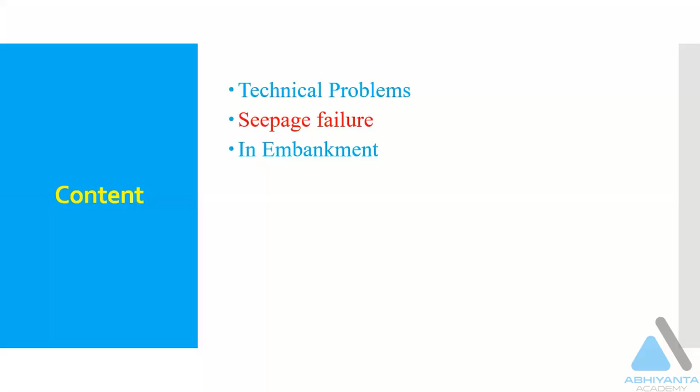First, we are going to discuss the technical problems. Then we are going to discuss the seepage failure, into the embankment as well as into the foundation. Then we are going to discuss water leakage, and then the methods to measure seepage.

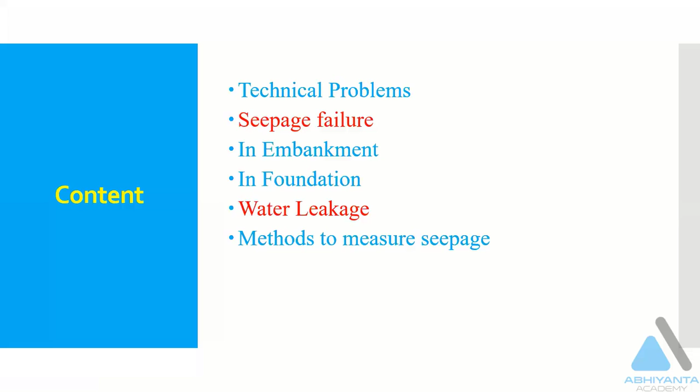Then we are going to discuss slope instability, overtopping and erosion. What you see in red colored font are the types of failure, and the remaining portion in blue are the contents.

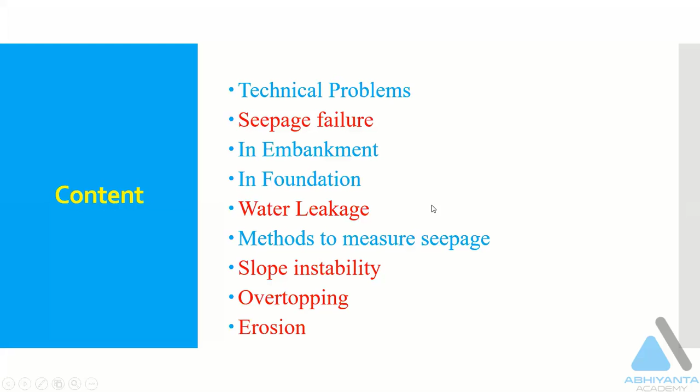So before that, we will discuss the introduction of canal failure. Now just tell me, if you are aware of the word canal failure, what are the causes of canal failure according to you?

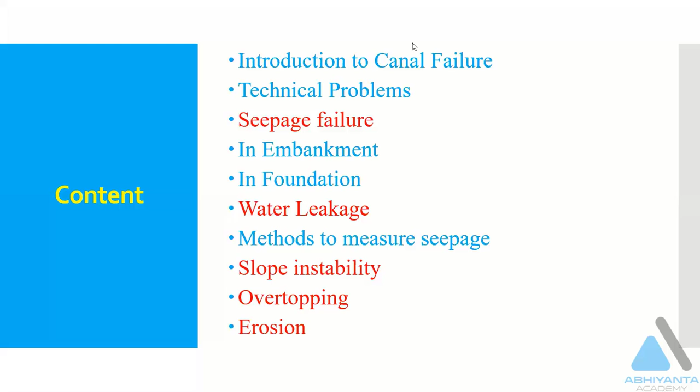Very good, Bhumi. So let's discuss that in detail. Suppose in an interview they ask you such a question, how are you going to react or share your views with the interviewer? So let's understand the introduction part.

The main problems found in an irrigation canal network include limited amount of water available at the water sources. This can lead to canal failure. Now let me show you how it will react or perform as a canal failure.

For example, this is your canal. This is your head regulator - a place from where we will initiate or discharge the water into the canal, from where we will start the canal flow. Now just try to think about it.

This is an unlined canal. If it is an unlined canal, it means we are all aware that this canal is an earthen canal - it's made of soil.

Now if water is flowing through this canal 24/7, it means the soil particles will remain saturated, or covered with full moisture. It will be saturated. But just try to think about it - the canal remains closed for 1 week in a month.

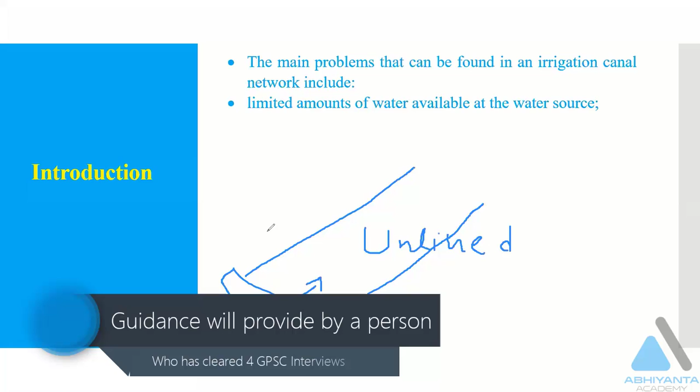Whenever we start the flow of water into the canal, due to its high velocity, there will be causes of erosion. When dry particles suddenly get hit by the water flow, scouring or erosion starts immediately.

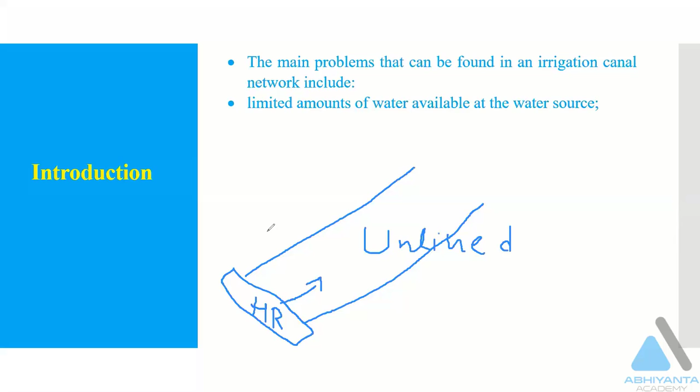What is the meaning of inundation canal? If you're aware of the word inundation, is there any difference between a perennial canal, a permanent canal, and an inundation canal? What's the difference between them?

A canal which doesn't allow flow of water throughout the year diverts flood water in a particular season when much flow is available, but doesn't run throughout the year like a perennial canal. So a canal which runs throughout the year - if I'm talking about the Narmada main canal, you find water in it for 12 months. That is a permanent canal.

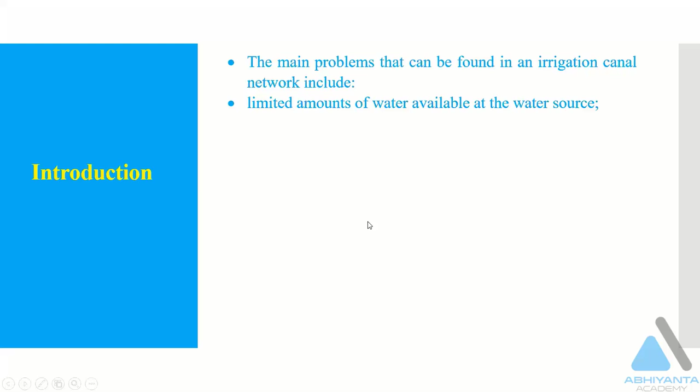That is, limited amount of water available at the water source, or periodic supply of water into the canal, then high water consumption in fields close to the water source resulting in water shortages at the tail end of the scheme. Canal failure doesn't just mean the canal bank breaks - if I'm not properly able to supply water, that is also failure of the canal network.

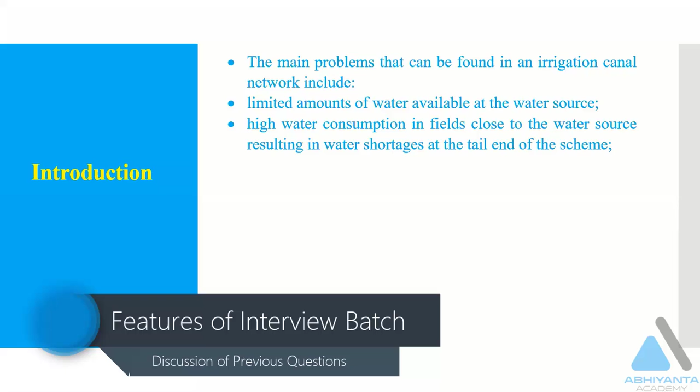If we have ample quantum of water but are not able to supply the water because of improper management, this is also considered failure of the canal.

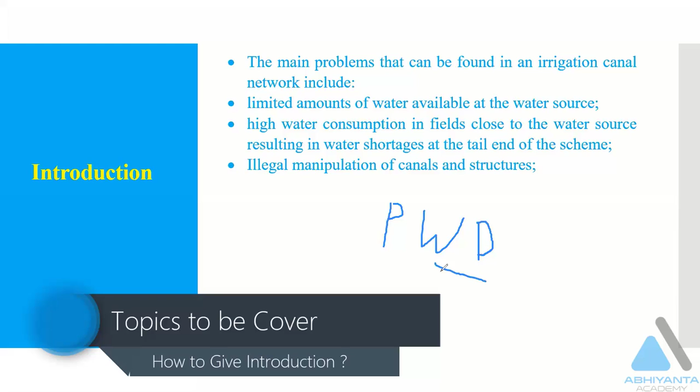When the technical field originated in Gujarat, at that time there was a common department which was the PWD department, Public Works Department - not Public Worst Department, it is Public Works Department. It had two parts: that was the Road and Building Department, and the second one related to irrigation.

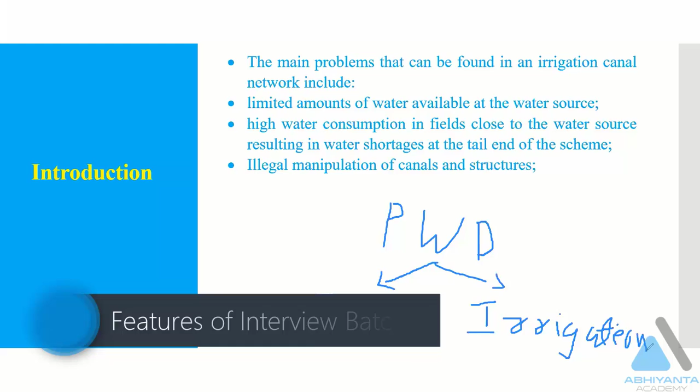During the decade of 1990, these two departments got separated due to the tremendous work pressure. But until the decade of 1990, these two departments were common.

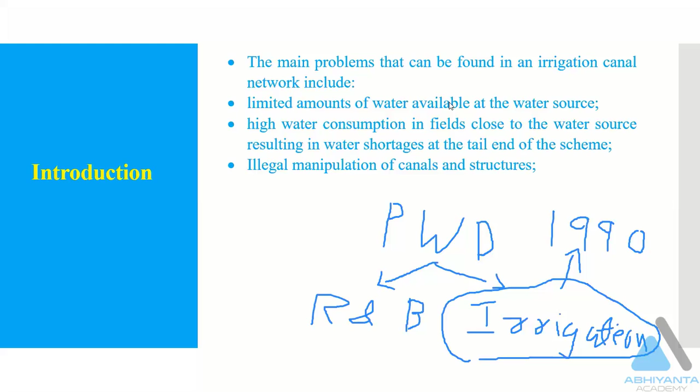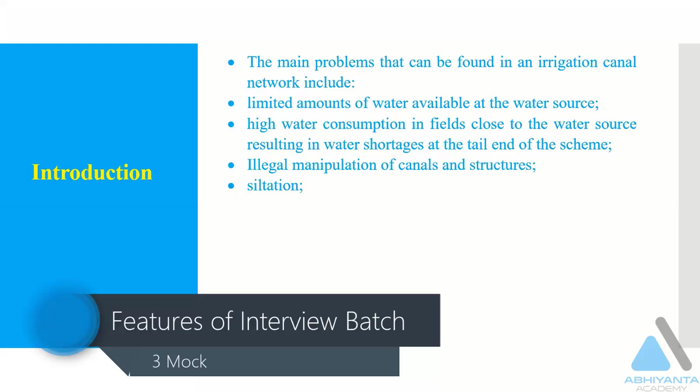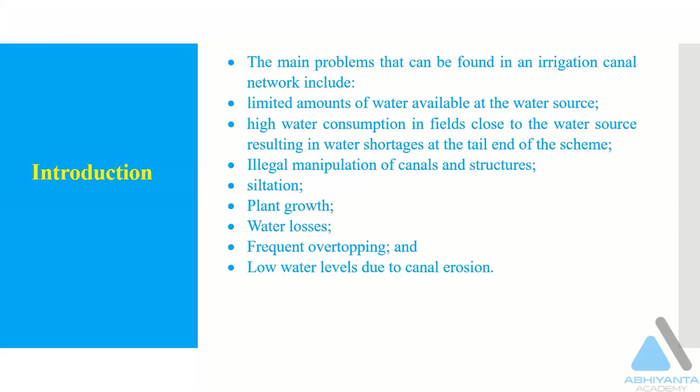Then after siltation, that is also a kind of major failure. Then there's plant growth, water losses, frequent overtopping, low water levels due to canal erosion, bad design, or bad construction.

Maybe you read in the newspaper a few days back that India is ranked first as a corrupted country among all countries in Asia. So bad construction can play a vital role into that. Generally, the majority's mindset is that once we become a government officer, we just have to do corruption. But if you are having the same mentality, please do not attend this session.

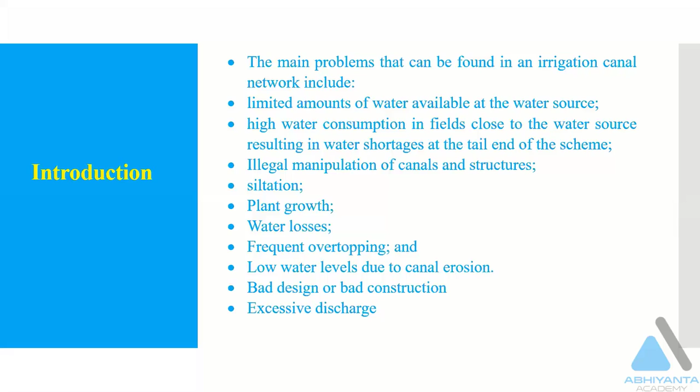Then there's excessive discharge - it means if we are supplying water into the canal beyond its capacity, more than its capacity, that can also cause canal failure. So these are all the various kinds of causes of canal failure.

Let's understand the different reasons too. Also, the water level in the canal may have been wrongly determined, and if it is too low, water may not enter the fields by gravity. So keep that thing in mind.

As I said, failure of the structure is not the only thing considered as canal failure. Just the canal structure failing is not the only canal failure. In addition to that, if we have failed to provide the water, we also call that a canal failure. So as being an irrigation engineer, this is also your role - to supply water to the field.

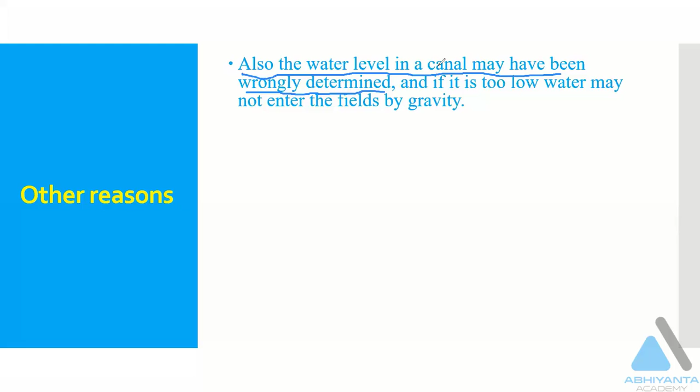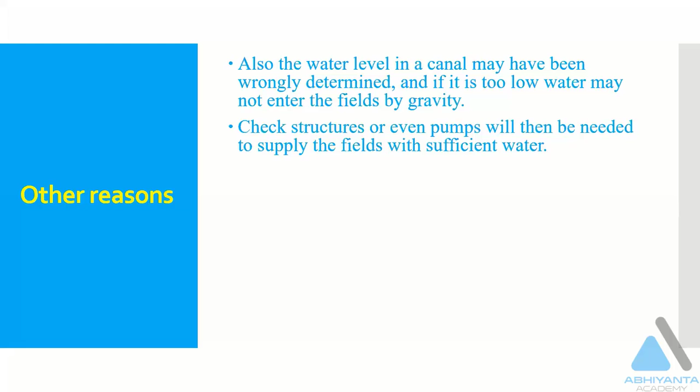Then after, other reasons are there. Check structures or even pumps will be needed to supply the fields with sufficient water. It can also happen due to pumps.

Canal slopes which are too steep may suffer erosion from high flow velocity. As I said earlier, due to high velocity there may be chances of erosion. So generally, where the slope is steeper, more failure happens due to erosion.

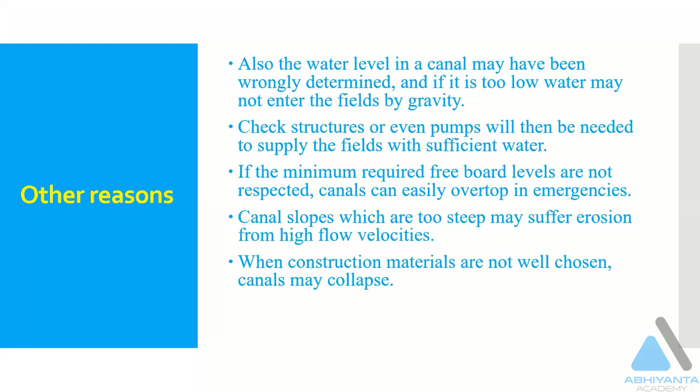When construction materials are not well chosen, the canal may collapse. In one session of ours, I taught you about quality control related to how to identify good material. If it is not following the quality of material, and we have chosen it wrongly, the canal may collapse.

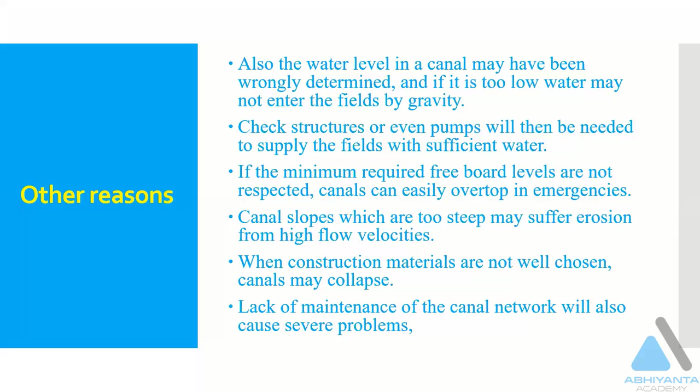Lack of maintenance of the canal network will also cause severe problems. If maintenance is not done properly, that can also cause canal failures. So there are not only limited reasons - there are an unlimited number of reasons behind canal failure. Any other important reasons, we will discuss in detail.

So that is about the technical problems, that is water losses. A well-designed and constructed canal system transports water from the source to the farmer's fields with a minimum amount of water loss.

Now just tell me, which kinds of losses do we normally consider in the canal network, generally?

Seepage, evaporation, very good. Now, which loss will majorly affect - evaporation loss or seepage loss? Which loss affects more, evaporation loss or seepage losses?

Very good, guys. I'm getting a few answers in the chat box. In a lined canal, there is canal evaporation. In an unlined canal, there is seepage. Very good, guys.

So an effective system is one in which the canal system has a minimum amount of losses. That is the effective canal network. But in our nation, approximately 40 to 45% losses are there, and which one is having the highest amount, that we need to understand.

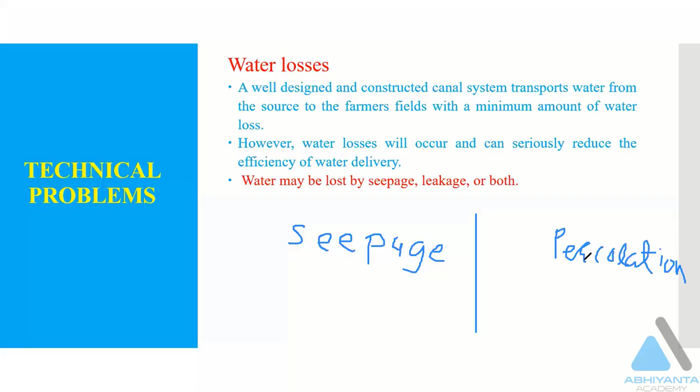Let me show you if you are not aware of that. Seepage is a velocity allowing the flow of water to pass through the soil voids or through the voids. So it is a velocity. Unit is meter per second.

Whereas percolation is the rate of flow. Rate means discharge. So it is measured in meter cube per second. You can see the differences between them.

Seepage and percolation - so seepage is a velocity, whereas leakage is related to the amount of water, the amount which is leaked, the water which is coming out. Seepage may be on the inner side or on the outer side, but leakage happens when it moves out - at that time we consider it as leakage.

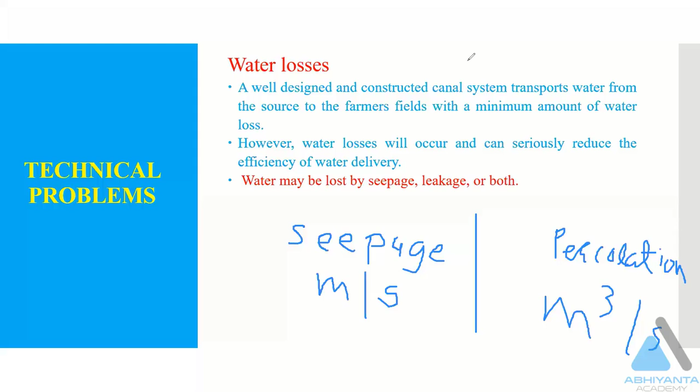So leakage is related to the amount of water, whereas seepage is related to the velocity of water. Leakage is related to the quantity of water, the amount of water.

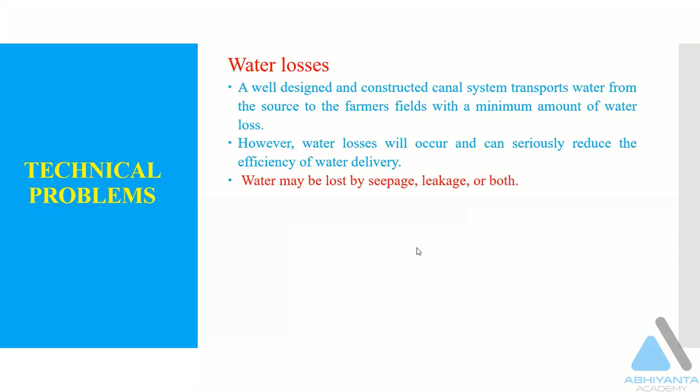Now let's understand what are the seepage losses in detail. Water that seeps through the bed and side of the canal will be lost for irrigation. This so-called seepage loss can be significant where a canal is constructed from material which has high permeability.

Now what do you think - is concrete a 100% impervious material? Is it having permeability too? It means, can I say that concrete is a 100% seepage-proof structure? Can I say that concrete is 100% seepage-proof?

No, I cannot say that. So in a lined canal, the amount of seepage will be lesser, whereas in an unlined canal it will be comparatively higher. Now this will affect more in the unlined canal - majority of this portion affects the unlined canal more.

So the so-called seepage losses can be significant where a canal is constructed from material which has high permeability. Water seeps quickly through sandy soil and slowly through clay soil. This question is also often asked - in which type of material will seepage losses be more, if a canal is constructed over sandy soil or over clayey soil.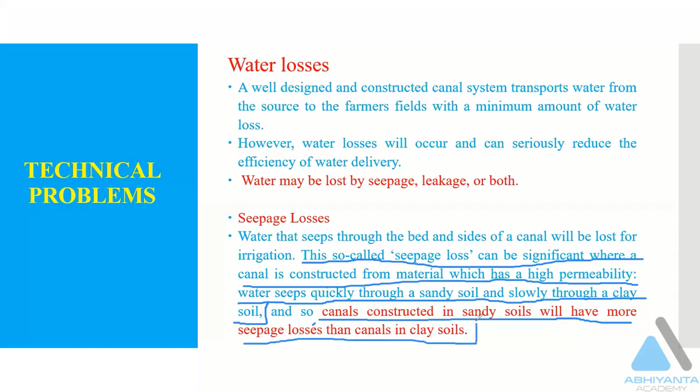So in sandy soil it will always be more, and in clayey soil it will be a little lesser compared to that. So canals constructed in sandy soils will have more seepage losses than canals in clayey soils. I have already concluded the sentence with the red font - it will be more helpful when you read it.

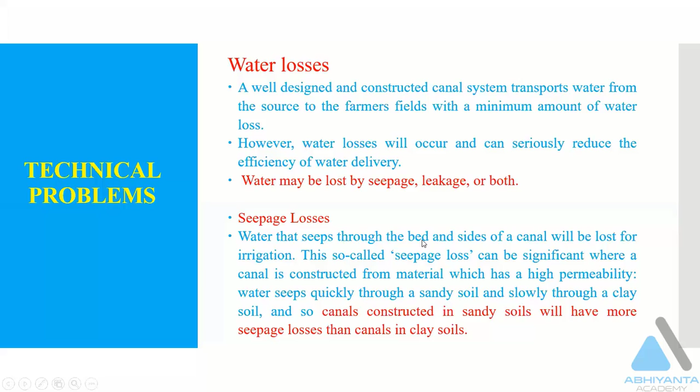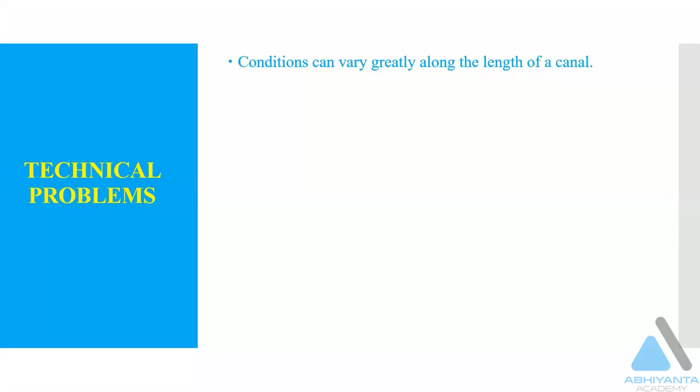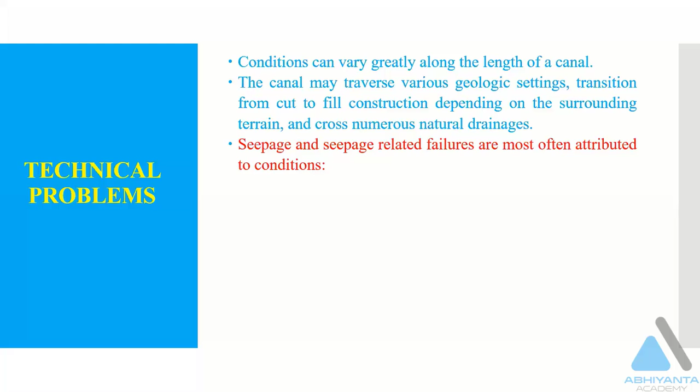This is a very important topic related to seepage losses. Understand this calmly - conditions can vary greatly along the length of canal. Condition need not be common throughout the length. At different locations there may be different values of seepage. The canal may traverse various geologic settings, transition from cutting to filling construction depending on the surrounding terrain, and cross numbers of natural drainages - meaning cross drainage structures like aqueduct, siphon aqueduct and similar. So all these parameters will impact the seepage losses - where the amount will be higher, where it will be lower, all these things will be covered in this particular topic. Seepage and seepage related failures are most often attributed to certain conditions - let's understand carefully which conditions.

Where the canal crosses natural drainages, where coarser alluvial soil might exist - this terminology is important to understand seepage losses. Now what do you mean by the word coarser alluvial soil, or forget about coarser - what do you mean by alluvial soils? Will it allow transport of silt? Will silt transportation happen inside it? Yes.

So if there is allowability of transportation of silt, there are always chances of higher seepage losses. Because with silt transportation, there are higher chances of scouring, higher chances of erosion. And because of that, fine particles wash out. When fine particles wash out, it creates voids. And voids create, it will allow the seepage. So wherever alluvial soil exists, seepage will always be higher compared to non-alluvial soil.

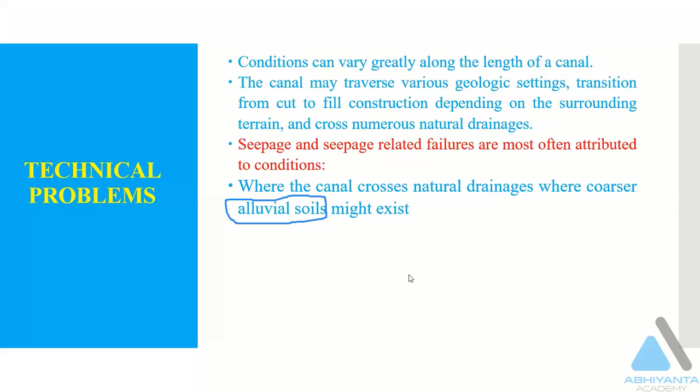Where the canal was constructed through geologic deposits that are more susceptible to erosion, in short granular materials - we construct canal in places where granular materials are more. It means there will be higher voids inside it. So if there are higher numbers of voids, it will allow higher seepage.

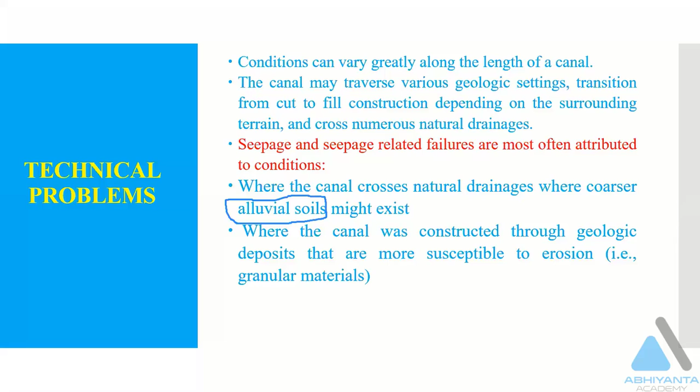Where soluble materials like caliche exist - has anyone seen this? It's known as, pronunciation is caliche. Where soluble materials exist in the foundation. Now just tell me, if I'm talking about salt, is salt soluble into water? Is it soluble into water? I don't know the exact Gujarati name. Yes. If I'm talking about sugar, is it soluble?

Now if I'm talking about stones, will they be soluble into water? No. So when I'm talking about alluvial soils, when I'm talking about silt particles, these are the solubles. As soon as water touches them, they mix into the water. They mix into the water and it is considered a soluble material. So if that exists in the foundation and there's an unlined canal next to it, those particles will keep washing out and there will be chances of higher seepage.

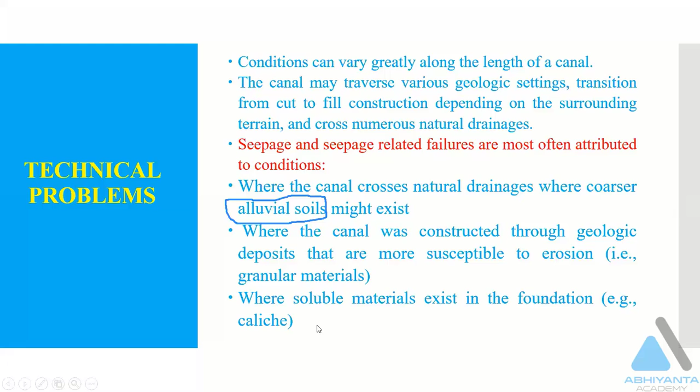Where the canal is elevated above the surrounding terrain or the embankment is narrow. Now just tell me, whenever you see any canal failures, in which area are there more chances of failure - in the cutting or in the filling? If the canal is constructed in cutting or if the canal is constructed in filling? What do you think?

Very good, guys. So if we have constructed a canal in filling, it means we are not able to achieve the same MDD and same OMC as compared to the natural soil. I won't get the same type of MDD or OMC as natural soil. As we know, we achieve only 85 to 95% of the MDD and OMC as per Indian standards. So whenever the canal is in filling, at that time there are higher chances of seepage losses.

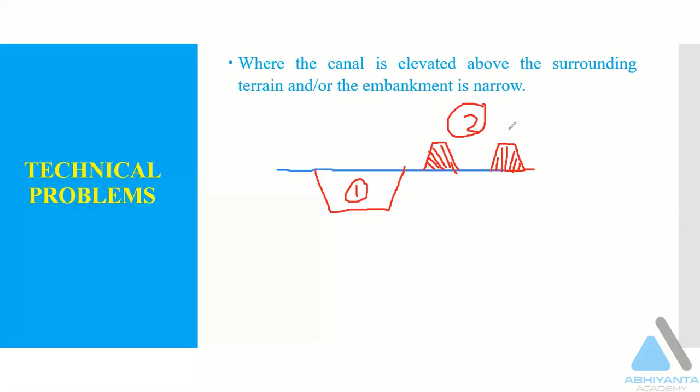So in filling, the chances are higher. Why are they higher? We will discuss that in upcoming slides - along construction flaws such as segregated or poorly compacted fill lifts.

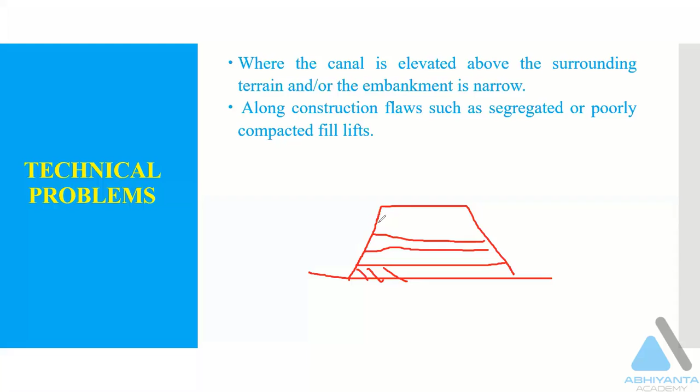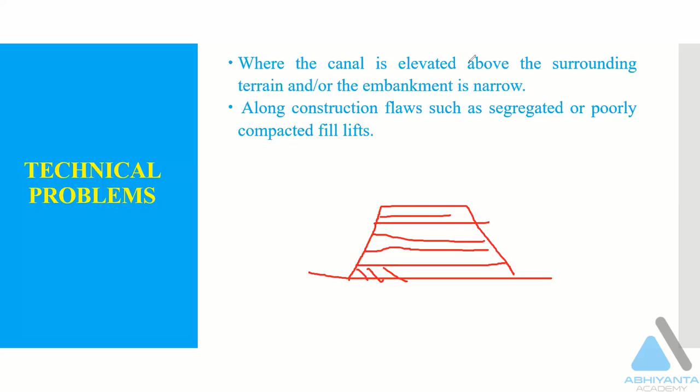So if it is not properly filled or if it is segregated, meaning there are voids in between, if it's not properly mixed, if proper rolling and watering is not done, at that time there are chances of higher seepage losses.

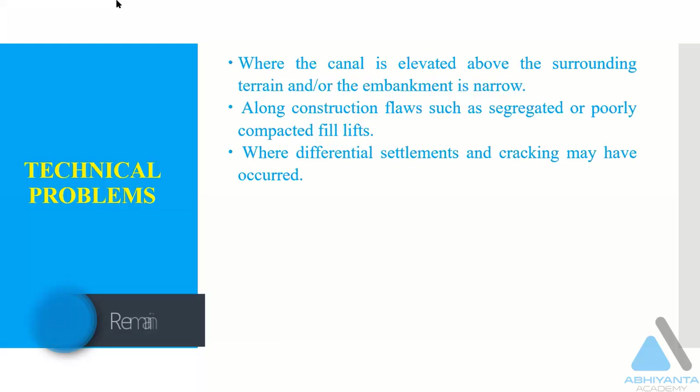So generally the second case scenario happens more during filling, and mostly this is the scenario that creates canal failure, where differential settlements and cracking may occur. When settlement happens at some location due to the geotechnical parameters of the soil, and cracks develop, there are also chances of seepage losses.

Along flaws created by burrowing animals or decaying tree root systems. This means tree roots or burrowing animals like rats creating burrows and such - due to this also seepage losses increase.